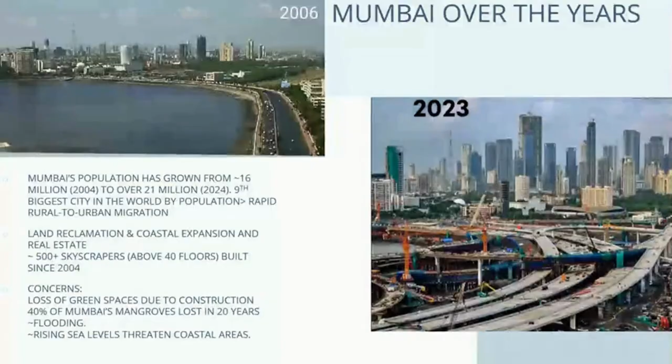Its population has grown tremendously in the past 2 decades, which is mostly fueled by rapid rural to urban migration. Its built environment has seen a significant change with land reclamation projects, bridges, and a multitude of skyscrapers. The environmental impact because of this is quite tangible, with loss of green spaces, unprecedented flooding, and rising sea levels. As an engineer working in the building sector, I believe I have a more direct impact on this.

This presentation, however, is about a construction material called concrete, which represents the most silent kind of danger of economic growth. Now, concrete or cement is the second most consumed substance on the planet, second only to water. It's the bedrock of economic and infrastructure growth. About 4 billion tons of it was produced in 2023. For reference, just 1.4 billion tons was produced back in 1995. This is expected to grow to 5.5 billion tons by 2050.

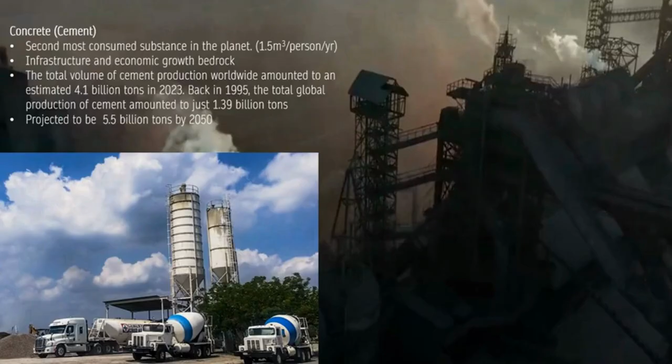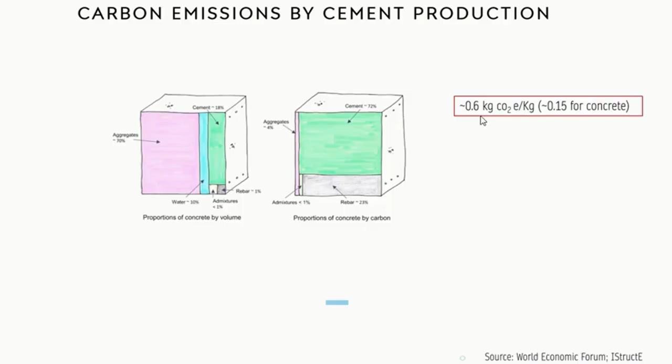It's critical to note that concrete production has resulted in almost 8% of the worldwide greenhouse gas emissions. Hence, it's imperative to understand and find steps to mitigate these emissions. Concrete is a mixture of constituent elements like sand and stones, which are bound together by an element called cement. Now, cement is what's responsible for the emissions. For every kg of cement produced, almost 0.6 kg of CO2 is released into the atmosphere.

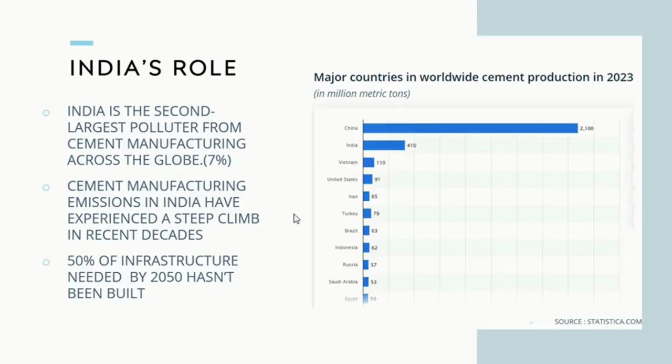About 410 million tons of cement was produced in the country in 2023 and is projected to grow to 660 million by 2030. The production capacity, however, is much higher. We will dive a bit deeper into the mechanism behind cement production. Naturally occurring limestone is heated in cylindrical steel containers called kilns to a very high temperature, which is then converted to lime or cement clinkers.

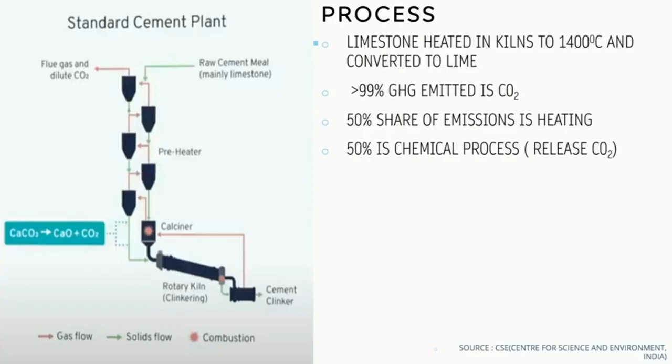Almost all the greenhouse gas emitted is CO2, as seen from this chemical reaction here. 50% of the overall CO2 comes from this chemical reaction, and the remaining 50% is because of the energy requirement to enable this reaction process. This comes mainly from electricity and other sources of fuels.

Identifying this problem, the Centre for Science and Environment India has laid a roadmap towards mitigation. In this graph, we see various emission scenarios for this sector by 2030. A business as usual scenario would result in almost twice the current emissions. But following appropriate steps and strategies, this rise can be contained, as seen from this last bar graph.

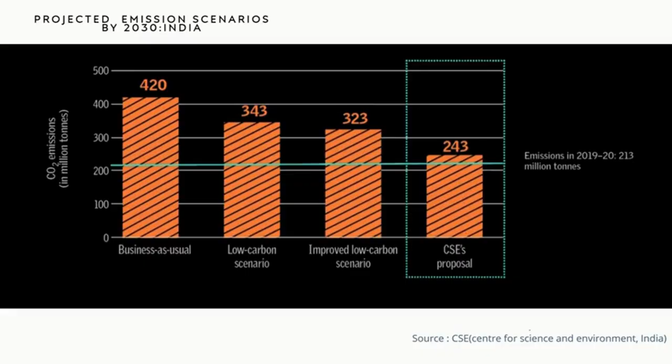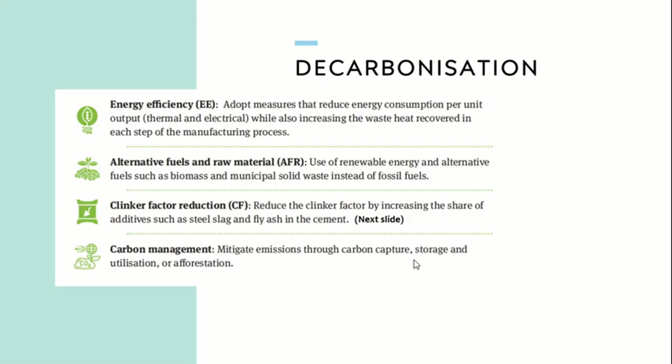Decarbonization can be classified into four broad areas. Adopting energy efficient processes during manufacturing, trying to recover waste heat along each step of the manufacturing process, using alternative fuels such as biomass and municipal solid waste, and in general trying to transition into more renewable sources of energy. Clinker factor reduction deals with the chemistry of the material. We'll look at this in the next slide. Finally, carbon management using technologies such as carbon capture. Government can provide incentives to companies trying to adopt decarbonization policies.

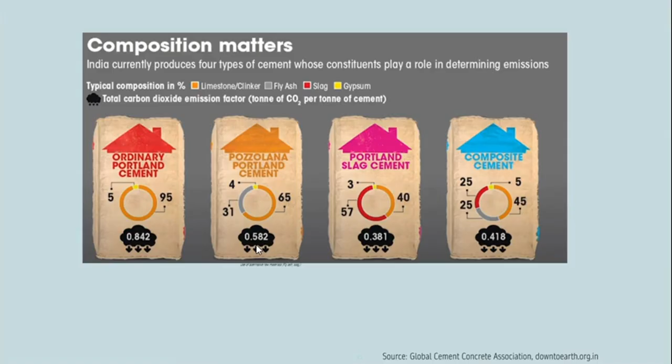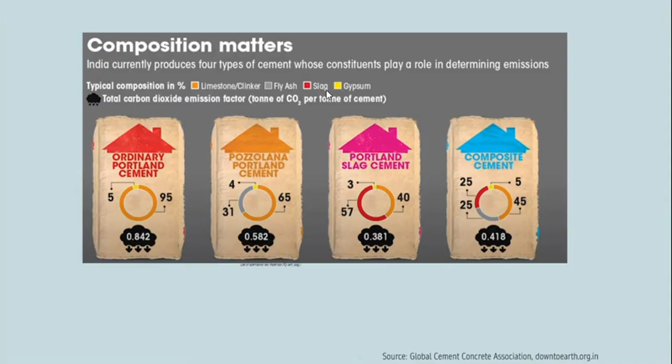There are four major types of cement produced in the country. The numbers in black here indicate the potential of carbon emissions. The more the carbon emitting potential, the more the amount of limestone or clinker present in that particular type of cement. This limestone can be replaced with supplementary materials such as fly ash and slag, which are basically byproducts of other industries. This can actually reduce its carbon emitting potential.

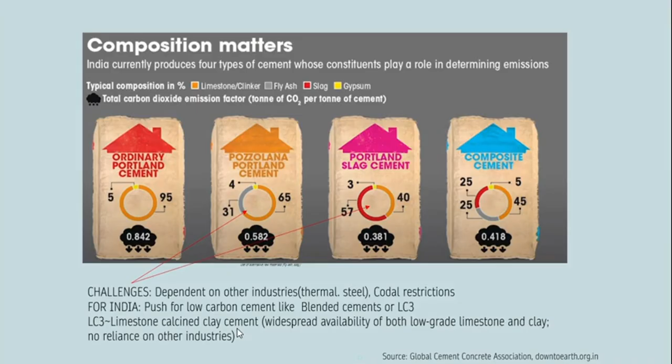The challenge with this is that it's dependent on other industries, which can become redundant in the future because of the transition to renewable sources of energy. Also, there's a limit to how much cement clinker can be replaced, as this can affect the strength of the concrete itself. Building codes usually provide a restriction on this. There are better long-term alternatives for a country like India, for example using blended cements like LC3, or limestone calcined clay cement. These use locally available low-grade limestone and clay.

Personally, since I'm part of the building industry, I can take a more proactive role in spreading awareness among stakeholders, builders, and even government policy. It's necessary to challenge the demand and intent of builders. Questions like, is it necessary to build a new structure? Is it possible to refurbish an old building? These kinds of questions are necessary.

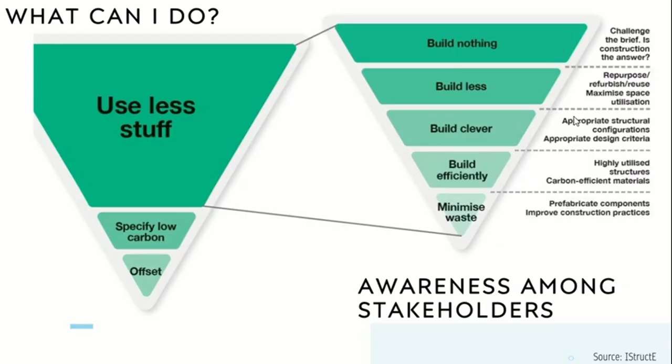If there is absolutely no choice but to build, then it's imperative to build as cleverly and efficiently as possible. For example, using low carbon materials. This reverse pyramid here actually captures the philosophy to be used.